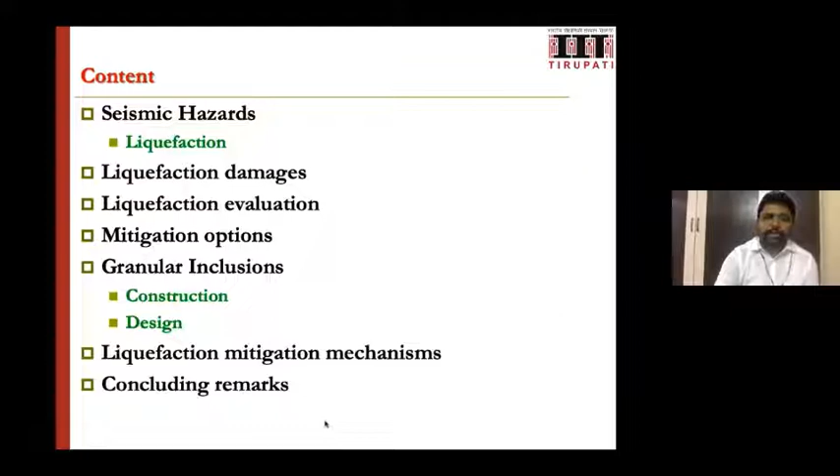This talk is mainly planned based on a publication, Engineering of Ground for Liquefaction Mitigation, which was published in a Springer book, Advances in Indian Earthquake Engineering and Seismology. Participants may refer to this for more details beyond the topic, and for important references.

Coming to the first thing, seismic hazards related to earthquakes and associated effects. I will not go into much detail as we all know. There will be several varieties of disturbances, basically due to loss of strength, that is less strength or less stiffness properties of various materials. We can talk about soil losing its stiffness, or material stiffness loss in the structure, and other sorts of strength loss and associated damages.

Particularly, the associated hazards include ground shaking and amplification, structural hazards, lateral spreading and associated failures, and another major set of seismic hazard is liquefaction, which is our topic of interest today.

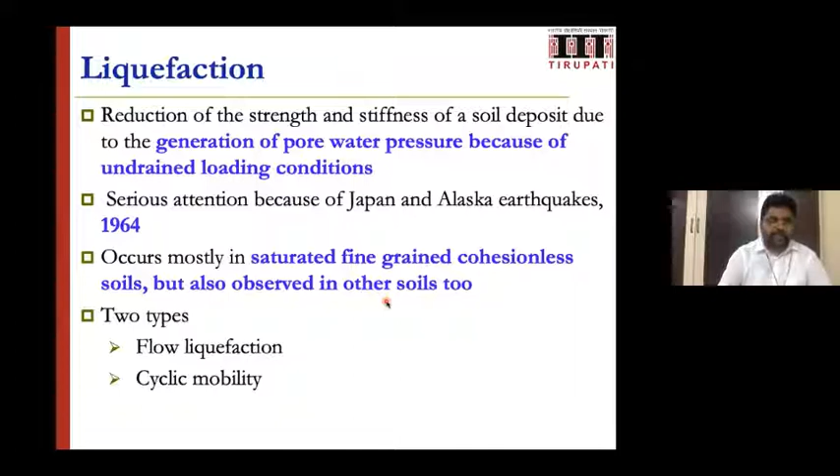This topic has been taken seriously into attention since 1964, after the Japan and Alaska earthquakes. In principle, mostly this occurs in saturated fine-grained soils, but it has also been observed in some other soils. Basically, when we talk about liquefaction, we can see two varieties: one is flow liquefaction, the other is cyclic mobility.

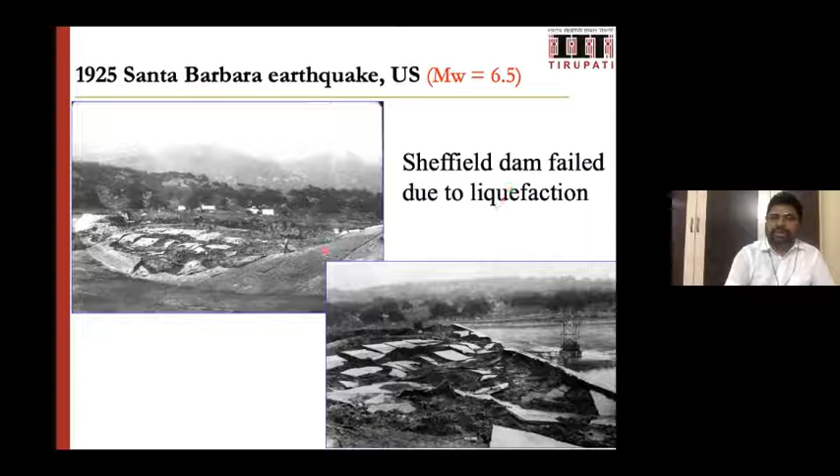With this brief introduction of liquefaction, let us see some pictures of liquefaction damages and how they appear. Starting from 1925, the Sheffield Dam failed due to liquefaction. You can see the extent of the damage and associated failure.

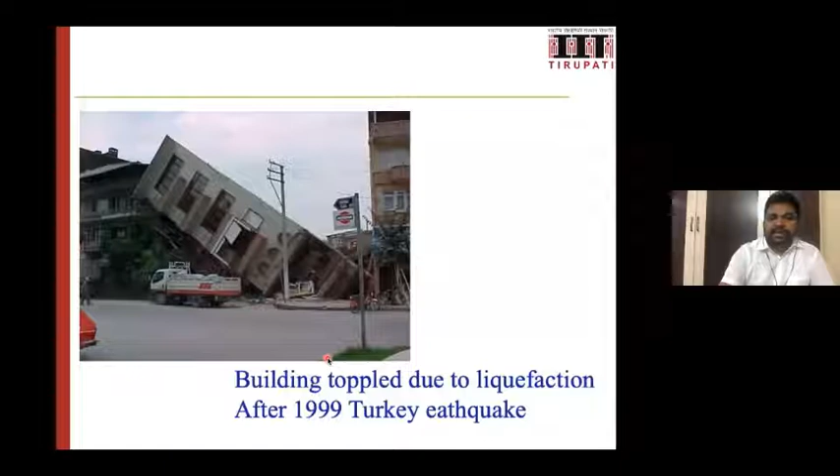This is the 1999 earthquake in Turkey, where a building collapsed due to liquefaction.

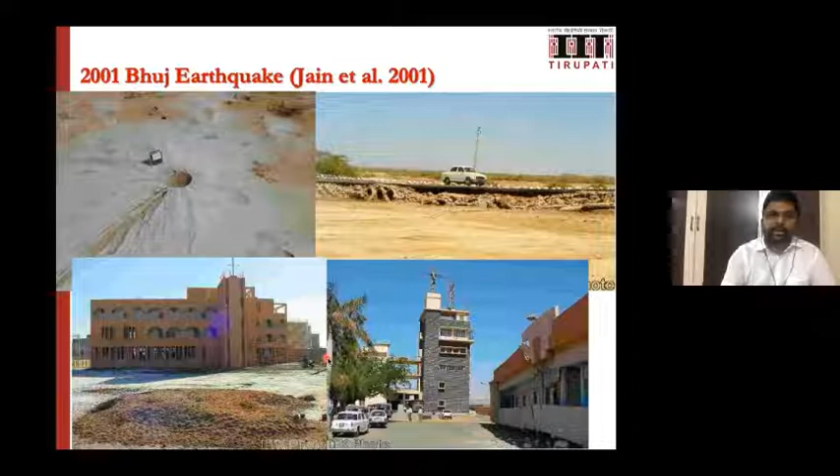Some examples from the 2001 Bhuj earthquake, particularly in India. I must say this 2001 Bhuj earthquake is one major earthquake which took earthquake-related studies to a much higher level; almost many institutes have since focused on studying liquefaction or seismic earthquake-related effects.

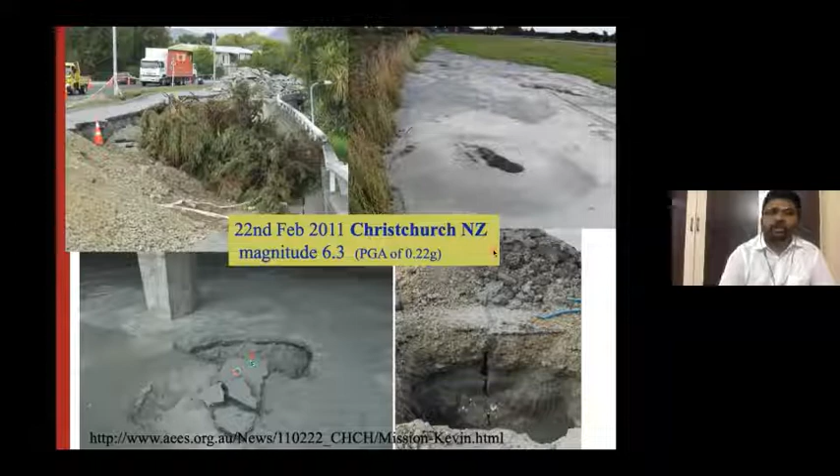The 2011 Christchurch earthquake in New Zealand, magnitude 6.3, shows the type of damages: soil coming out and huge soil failures.

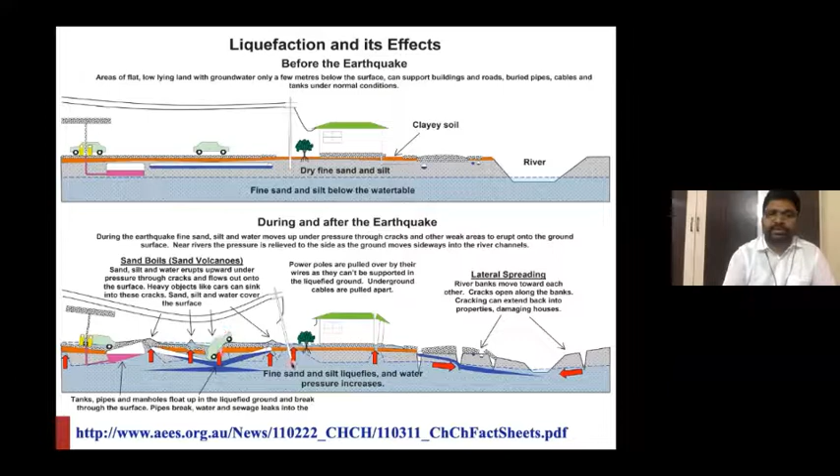This is one interesting image explaining the before-earthquake and after-earthquake situation and how various structures suffer. I like this picture, which schematically explains various features of liquefaction. You can see concepts like a vehicle going inside the ground and underground structures coming up.

One interesting thing is re-liquefaction. A site which has been liquefied earlier may also get liquefied again depending on the seismic history and how strong the new earthquake motion is. There are some evidences that re-liquefaction can happen; it's not that once it happened, it may not happen again.

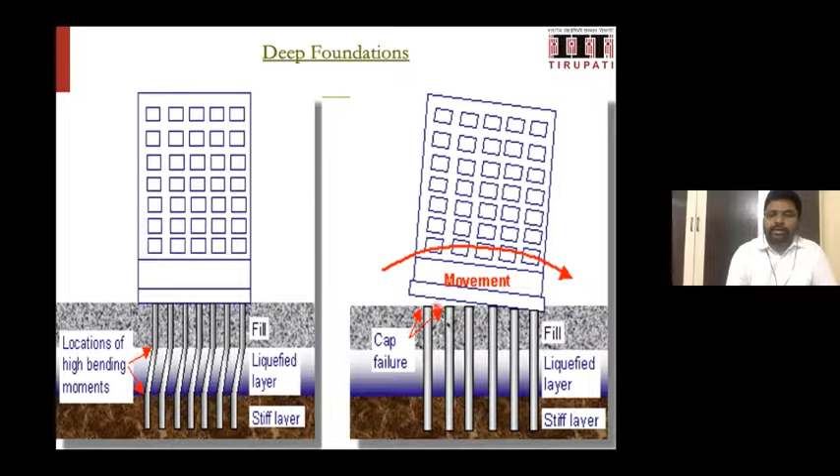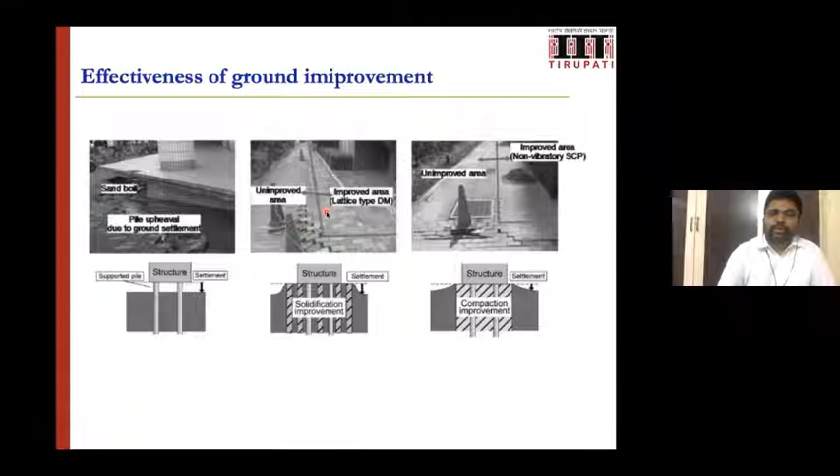What happens if liquefaction occurs with a combination of improved and unimproved ground? You can see the improved ground significantly behaved well in liquefaction, reducing damage. This is a particular example from the 2011 earthquake at a construction site where part of the site was improved and did not liquefy, while the unimproved part did liquefy. This clearly shows ground improvement works significantly.

With these simple pictures, we can relook into the definition: loss of shear strength due to excess pore water pressure generation. Cyclic mobility is a class where there's a gradual increase of cyclic strains. Here it's not complete loss of strength, but a reduction in strength, with more strains happening.

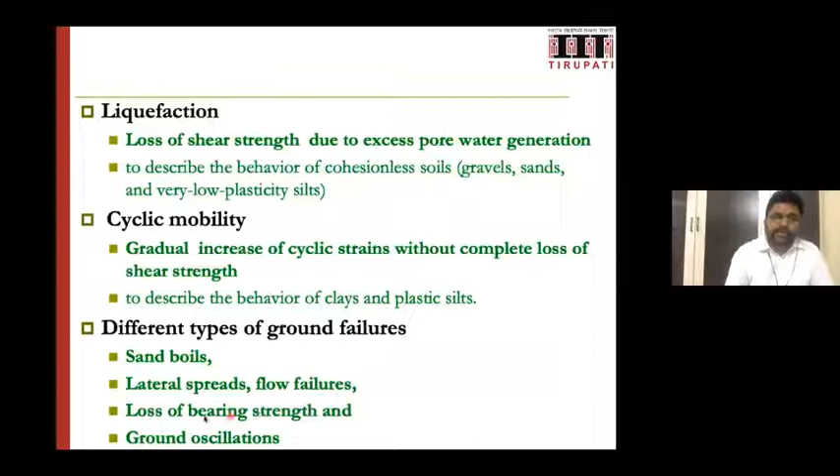Some of the signatures can be seen in terms of sand boils, lateral spreads, flow failures, loss of bearing strength, and ground oscillations, etc.

So which soils will get liquefied and how to predict it? Here are some of the conditions reported in various literature. Basically, to get a preliminary estimate of whether a particular soil site is liquefiable: if the groundwater level is less than 10 meters and there's a saturated soil layer at a depth of less than 20 meters, then there's a possibility of liquefaction. Then we can go for further analysis.

Fines content is generally preferred to be less than 35%, or plastic index less than 15, even if the fines content is more than 35%. Also, D50 should be less than 10mm and D10 less than 1mm. These are the probable typical soil properties.

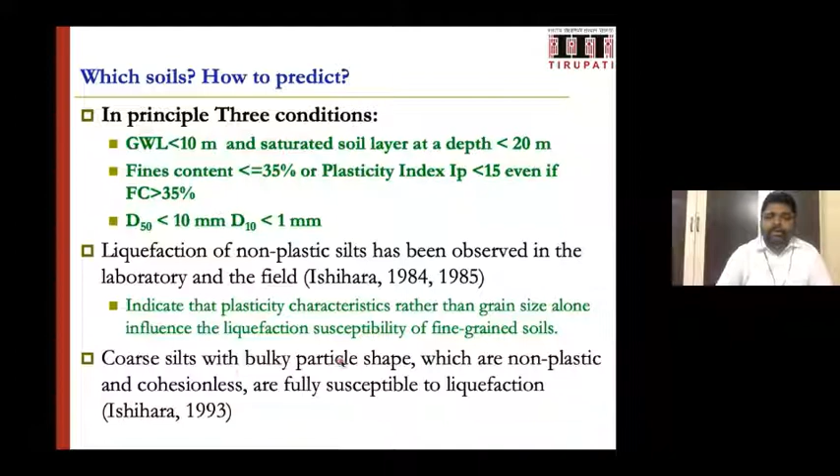Besides this, liquefaction of non-plastic silts has also been observed in the laboratory and field - some references exist. Coarse silts and bulky particle shapes are also reported to liquefy from earlier studies.

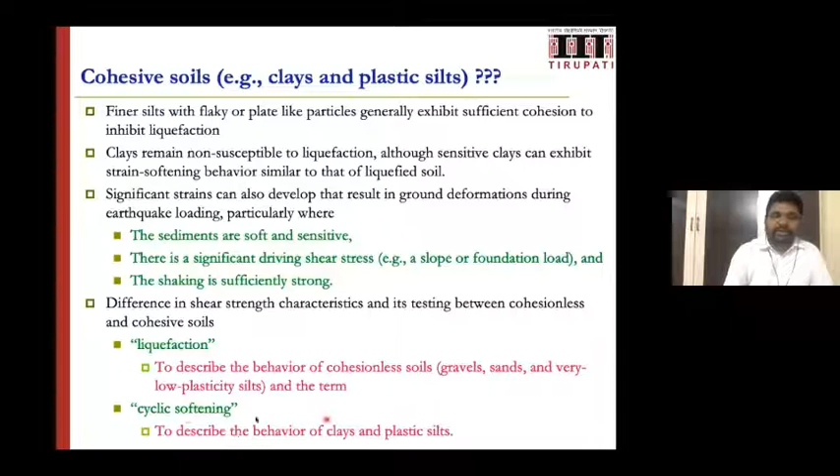For cohesive soils, it was earlier assumed they may not get liquefied, but there were several cases where cohesive soils were also found to liquefy, where researchers clearly defined liquefaction versus cyclic softening. Cyclic softening is another subcategory of liquefaction, and this behavior can easily be found in clays and plastic silts.

For fine-grained soils, criteria for liquefaction in terms of percentage finer, liquid limit, natural water content, and liquidity index are some of the limits proposed by Chinese criteria and the US Army Corps of Engineers.

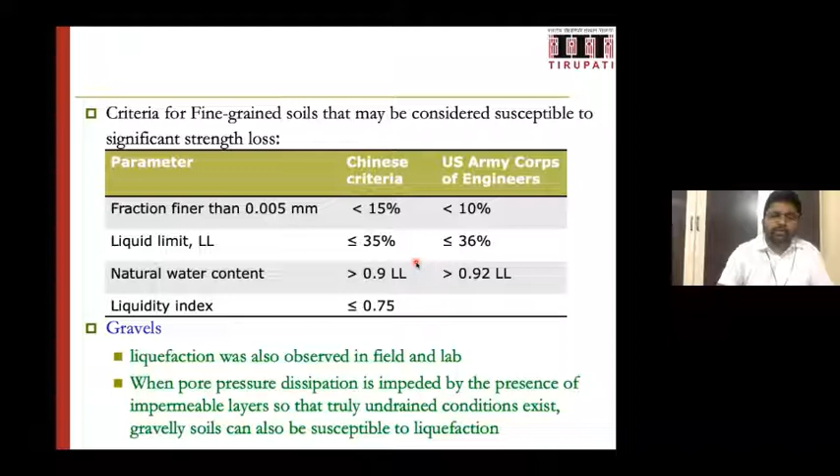Beyond sands and cohesive materials, gravels also tend to liquefy - some studies and observations were found in the literature. So we cannot eliminate any particular category; all soils tend to liquefy after meeting some particular criteria parameters. These are some of the various factors governing liquefaction in the field. Not going into details, just for academic interest, I mentioned these things for understanding.

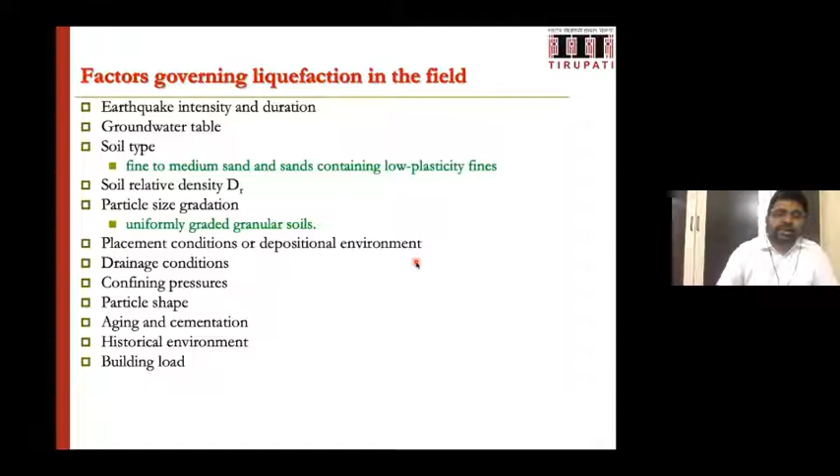Having that basic understanding about whether a particular soil site is going to liquefy or not, one can go into much more detail of evaluation of liquefaction potential. Various methods are available, starting from the simplified method, which is a cyclic stress-based method, and the cyclic strain-based method. These are linked with semi-empirical methods based on in situ test results.

All these in situ parameters can be taken into consideration, and using the semi-empirical method with the stress-based and strain-based cyclic approach, one can evaluate the liquefaction potential of the particular site. Besides this simplified method, one can go for effective stress time history models to analyze liquefaction, and some studies are available using the probabilistic approach.

Beyond this, there are elaborate, sophisticated experimental methods. Laboratory test methods can be at elemental scale, just to do some laboratory scale element tests, in the case of cyclic triaxial test, cyclic direct simple shear test, cyclic torsion shear test, etc. As a model test, one can think of the shaking table test and dynamic centrifuge test, which the previous speaker has already touched upon.

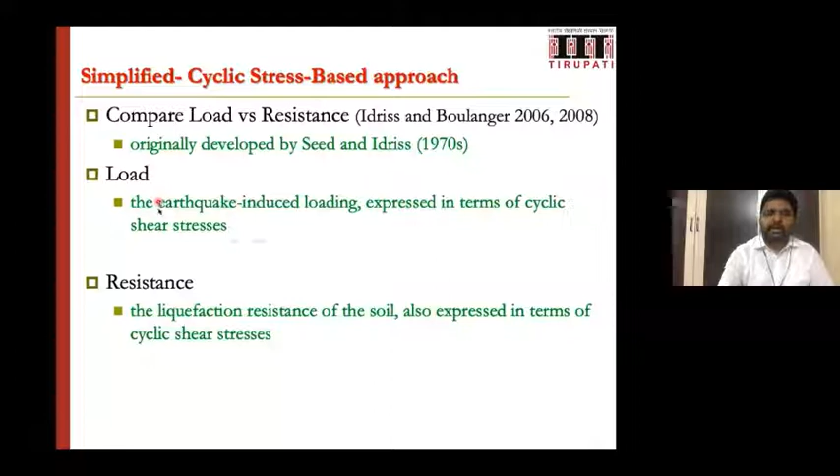Of course, it was originally developed by Seed and Idriss method in the 1970s. In this particular method, the load will be characterized in terms of tau cyclic, which is basically a function of earthquake acceleration and vertical stress, whereas resistance will be characterized as the liquefaction resistance of the soil, a function of your in situ parameter. It can be SPT value or CPT resistance, and then earthquake magnitude, percentage fines - these are the things that come in.

So if you have the load and resistance calculated, one can calculate the liquefaction resistance in terms of a factor of safety, as a ratio of resistance versus load. That's a simple framework of this simplified cyclic stress-based approach.

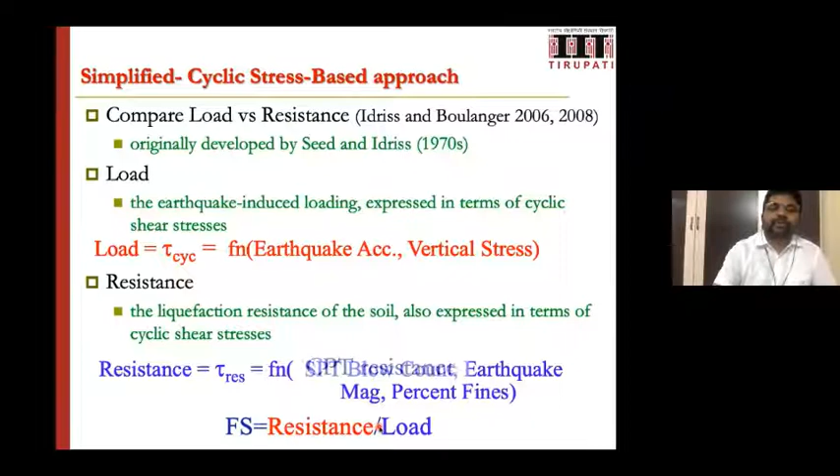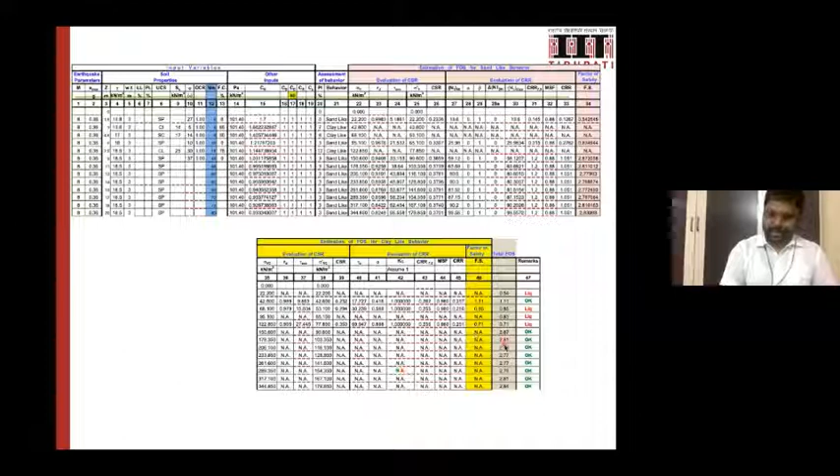This is one particular example I'm presenting here. Suppose if you have the soil profile, and the SPT values of this particular site, one can do some calculations referring to the Idriss and Boulanger method, and calculate the factor of safety, evolving this particular graph of factor of safety with depth. You can see where the factor of safety is less than 1, we consider that a liquefiable soil.

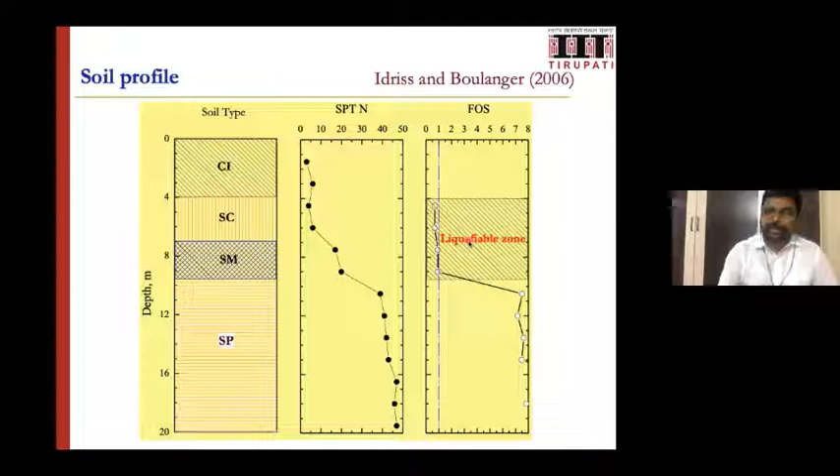Please note that it's not the case that factor of safety greater than 1 is completely safe. Excess pore water pressures can develop even if the computed factor of safety is greater than 1. Here's one particular figure which I'd like to show bigger.

The residual excess pore water pressures, if it is 0 to 1, are there, and factor of safety against liquefaction is 1 to 2.5. That means even if your factor of safety is somewhere around 1.5, there is significant amount of pore water pressure, up to about 30-35%. The associated change in effective stress, the associated change in strength of the soil, need to be considered for evaluating the strength of the particular ground under these conditions.

Suppose if you see the factor of safety within this region, within 1.25, the pore water pressures may go up to about 0.5, 0.5 to 0.2. So accordingly, we have to take a decision on what factor of safety we need to take, and accordingly we need to analyze the particular structure.

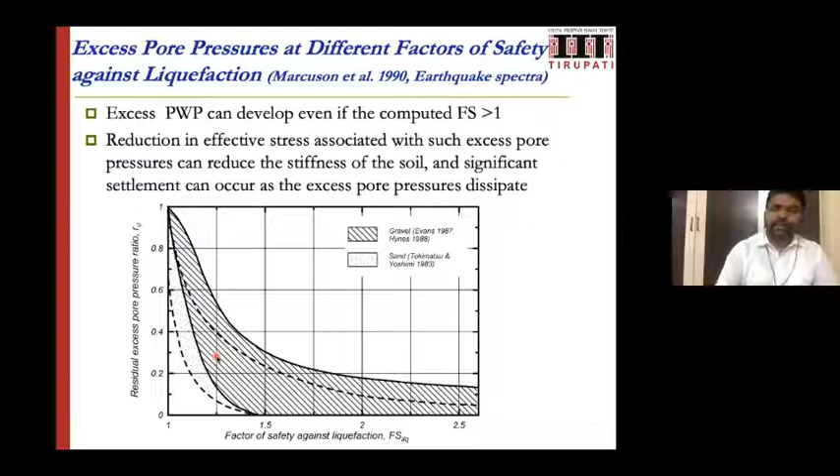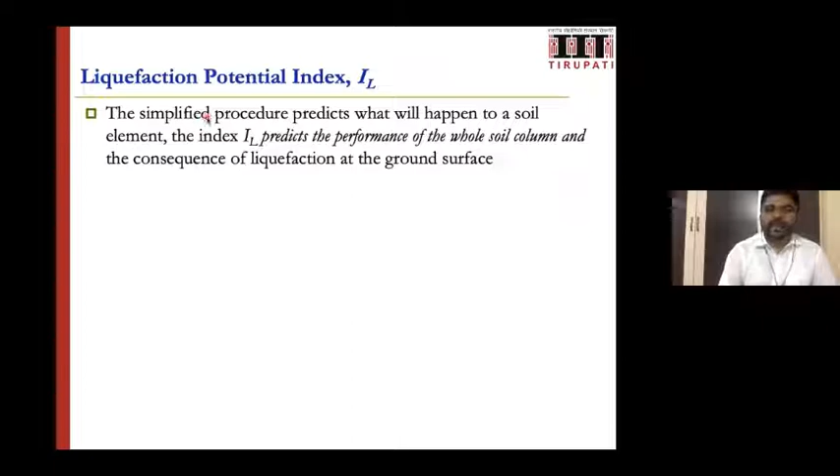Besides this factor of safety approach, because the factor of safety varies at different elevations, what value to be taken and how to consider the particular site is a bit confusing. So liquefaction potential index, LPI, is another parameter which can be taken to evaluate for a particular site.

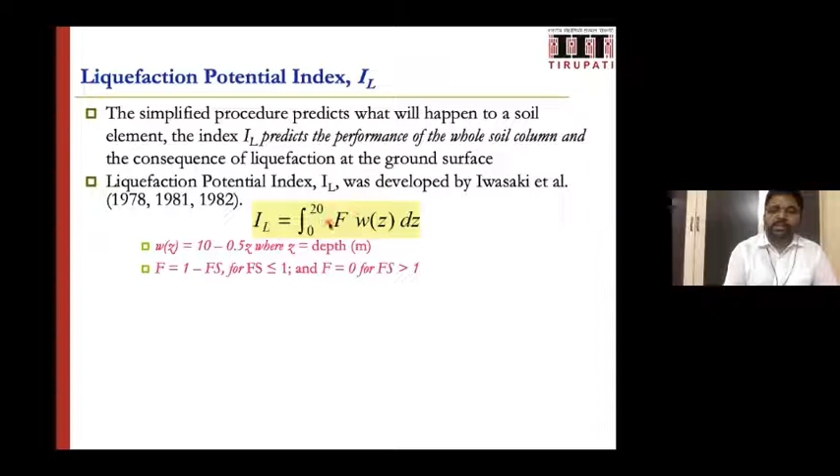What it does is take the factor of safety values for a whole depth of up to 20 meters and integrate them to give you an index. Based on the index values, one can classify the severity of liquefaction at a particular site: IL equal to 0 means very low, and IL greater than 15 means liquefaction potential is very high. One can refer to these references for the severity values.

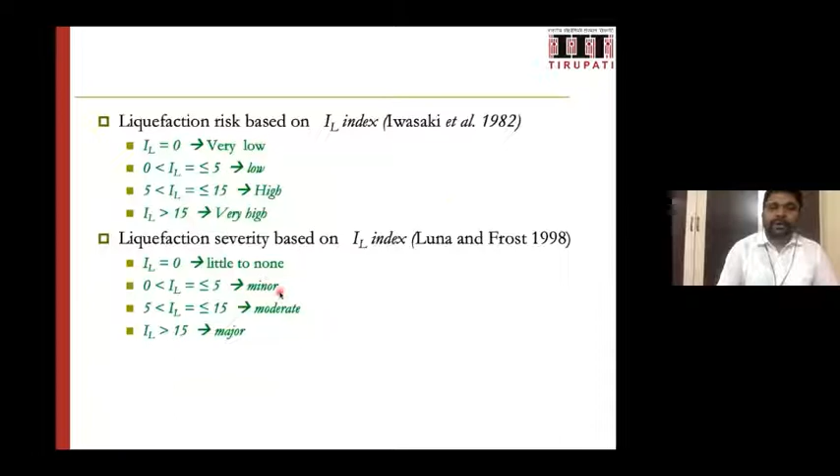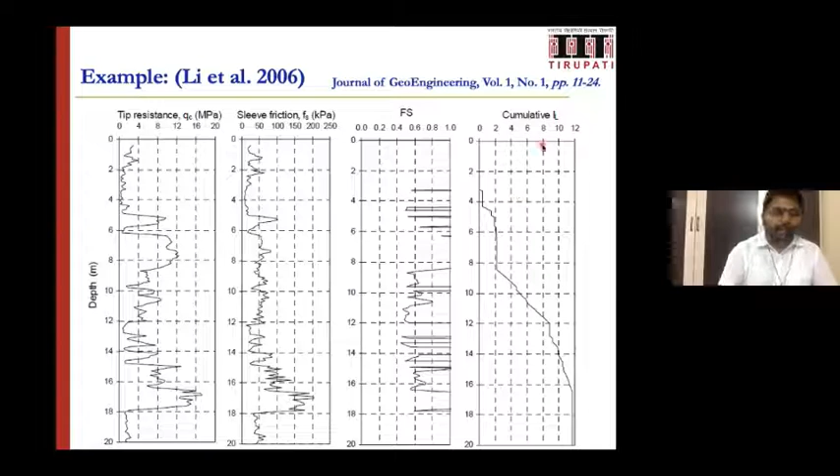This is one example where Li (2006) presented factor of safety values and the cumulative liquefaction potential index (LPI) value. As mentioned, there are also studies for liquefaction evaluation based on a probability-based approach.

Suppose after evaluation you find the ground is liquefiable—what to do? Basically, improve the engineering properties and reinforce the soil to resist seismic loads, and provide additional drainage, since liquefaction is due to generation of excess pore water pressure. If you provide additional drainage, the generated pore water pressures dissipate immediately, minimizing damage. Also, since this is due to the groundwater level, one can reduce the groundwater level at the site to avoid liquefaction in the first place. These are the things one needs to apply in principle.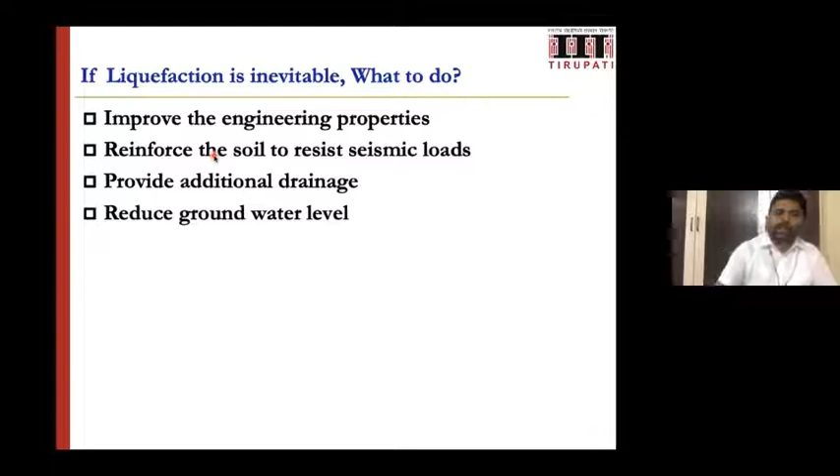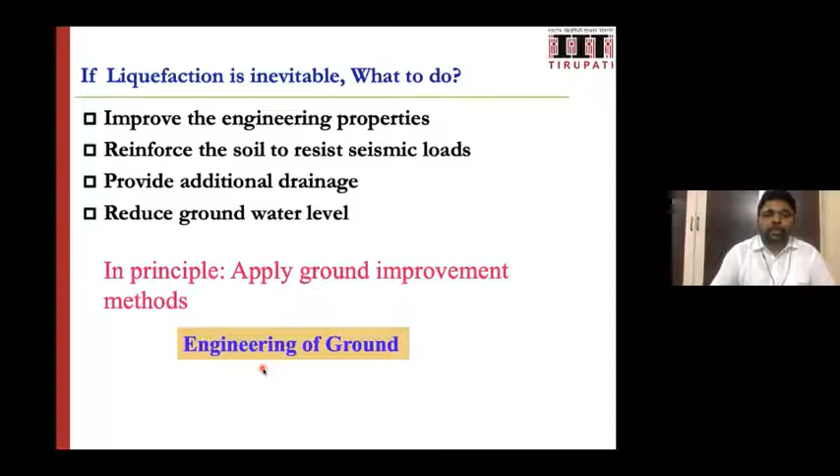How to apply? In principle, we have to apply ground improvement methods—engineering of the ground. Various ground engineering and improvement methods will be looked into, and applied accordingly.

What are the ground engineering options? Various ground improvement methods can be classified in terms of concepts like densification—improving the density of the ground, making it stiffer, more densified and compacted. Another concept is solidification: soil particles are particulate in nature, but if you solidify them into a coherent, cohesive material, it can resist more shear.

In some places we can replace with suitable soils—if the soil is very weak and highly problematic, we need to go for replacement. In other cases, we put elements like stone columns and deep mixing, or other reinforcement elements. And as mentioned, drainage and lowering the groundwater is another mechanism: providing drainage is one thing, lowering the groundwater level is another. These are the concepts applied for engineering the ground for liquefaction mitigation.

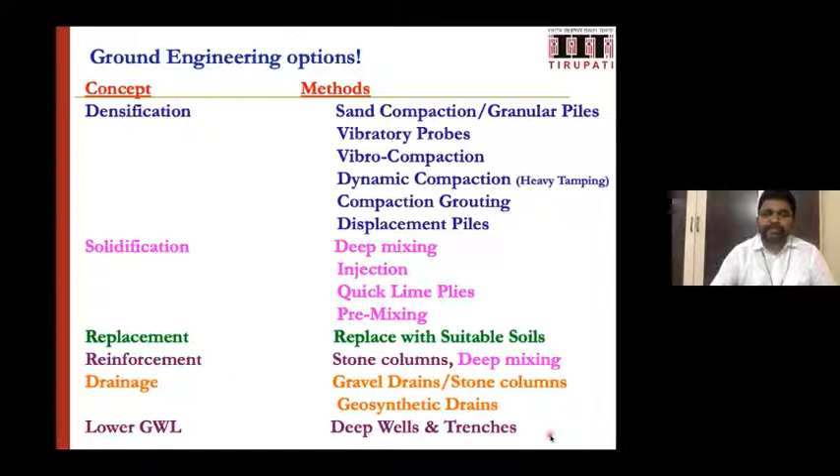Of course, to lower the groundwater level, one will apply deep wells and trenches. These are the overall class of ground engineering methods, various things.

This is another interesting topic: which method can be applied for what type of soil, because a wide variety of methods are there. So depending on the type of soil, one can see which is more suitable.

This particular figure was presented by Mitchell in 2008, showing general applicability of ground improvement methods for most liquefiable soils. This is the range, two borders shown here, representing the soil grain size distribution curve range. This shaded range is the soils which are most liquefiable. So almost all ground improvement methods can be considered for liquefaction mitigation.

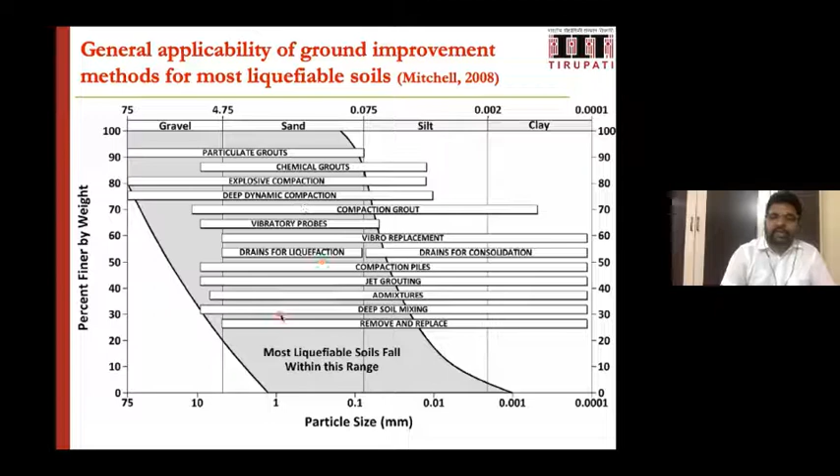With that overall view of ground improvement methods or ground engineering options, granular inclusions in the form of granular piles, sand compaction piles, or stone columns can give various mechanisms. They function as reinforcement, as a drainage medium, and as a densification method. Because it offers three different principles, they are more effective in mitigating liquefaction.

Some advantages are low energy utilization and cost effectiveness while building stone columns, increased bearing capacity, and reduced settlements. Because they provide additional drainage, even other than for liquefaction, they accelerate consolidation and also permit construction on fills. Even in fills, if you install this, vehicular movement and other activities can be done.

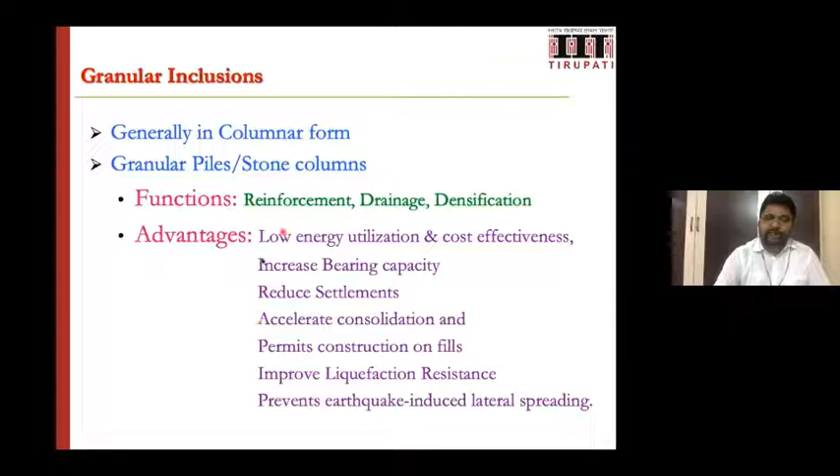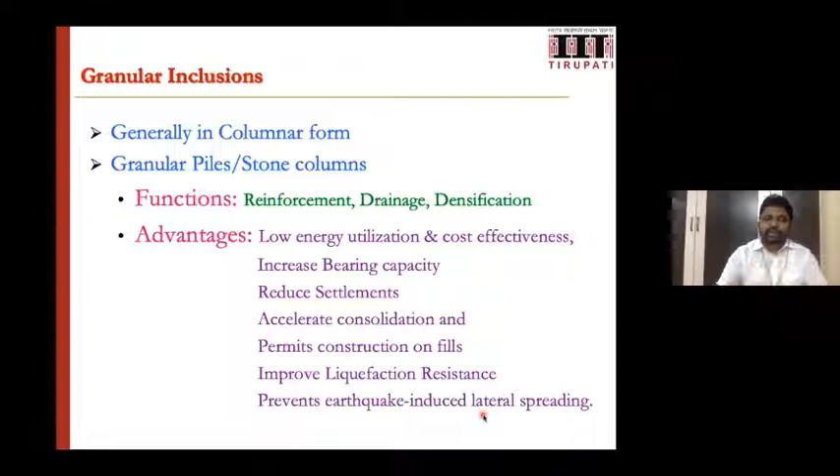Besides these general advantages associated with granular stone columns, they improve liquefaction resistance through all these behavioral improvements, and also prevent earthquake-induced lateral spreading because the high stiffness elements act as a reinforcing effect and are able to resist a lot of shear forces. So earthquake-induced lateral spreading can be prevented using these granular inclusions.

So what are these stone columns? They are installed in a pattern onto the entire ground as columnar inclusions, installed for a height h, at a lateral spacing s, and the stone column diameter d can be considered. These dots are the stone columns, arranged in a particular pattern, covering the entire ground.

Based on this particular pattern and spacing, one can calculate the effective zone. Each particular stone column's controlling behavior will be controlled within that zone. If you take this particular unit part, we will consider this as a unit cell.

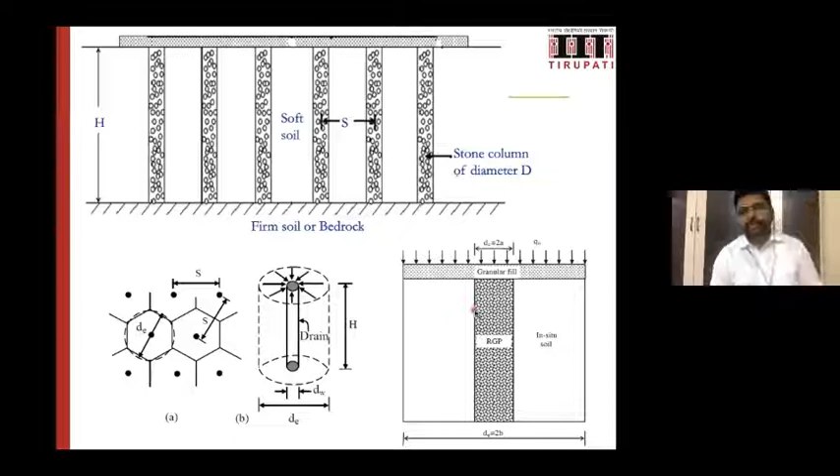So a unit cell can be taken in this particular way. This is the granular pile and the surrounding soil. Over this, a granular blanket will generally be provided to distribute the loads uniformly and to maintain the strain compatibility between the neighboring soil and the stone columns.

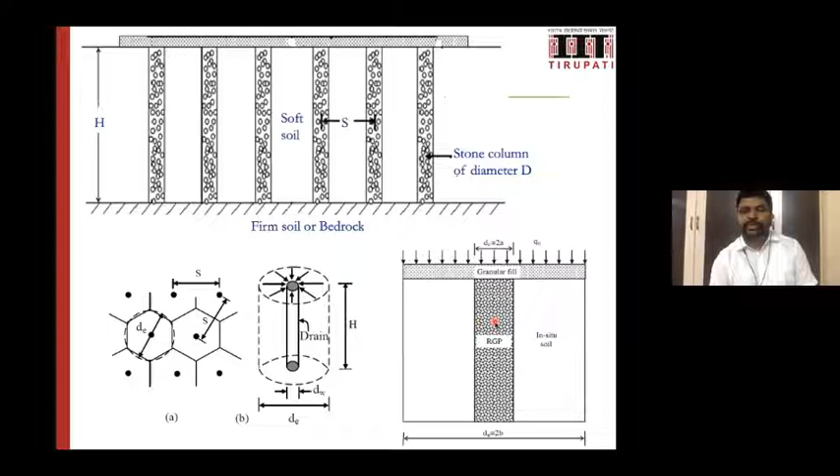So that the whole composite ground performance is improved significantly. As I mentioned, different patterns can be followed: triangular pattern, square pattern, or hexagonal pattern. Accordingly, the unit cell contributing areas will be slightly different, and the contributing areas will be calculated as per this.

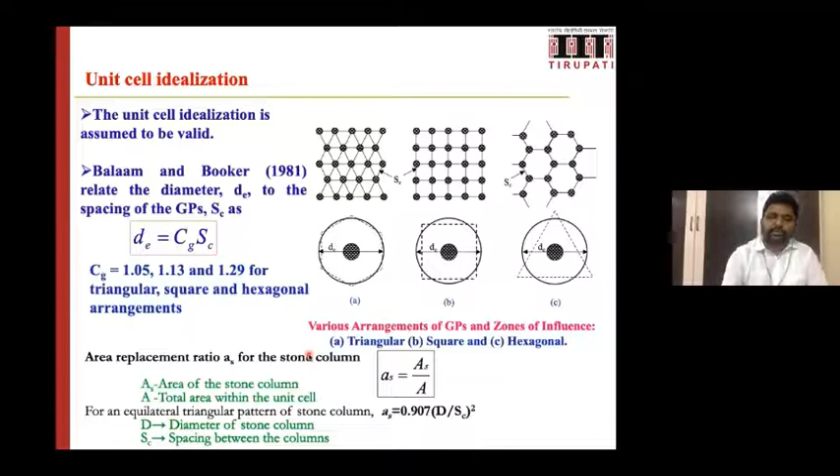So while analyzing this stone column reinforced ground, the area replacement ratio AS for the stone column, which is the ratio of AS by A, is an important parameter which will be considered for further analysis and understanding.

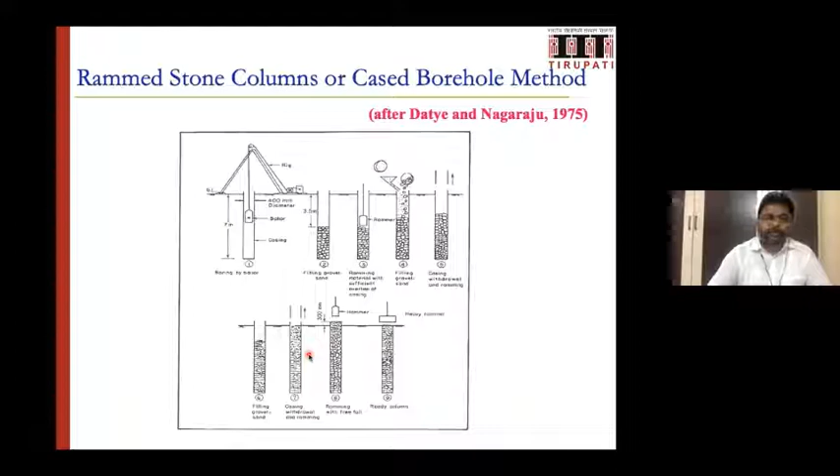Stone columns can be constructed using the vibro technique: vibro compaction, vibro replacement. Again, you have the wet method and dry method, and I'm not going into details. There's also the rammed stone columns or cased borehole method, which is an Indian method of stone column construction, being practiced in different locations.

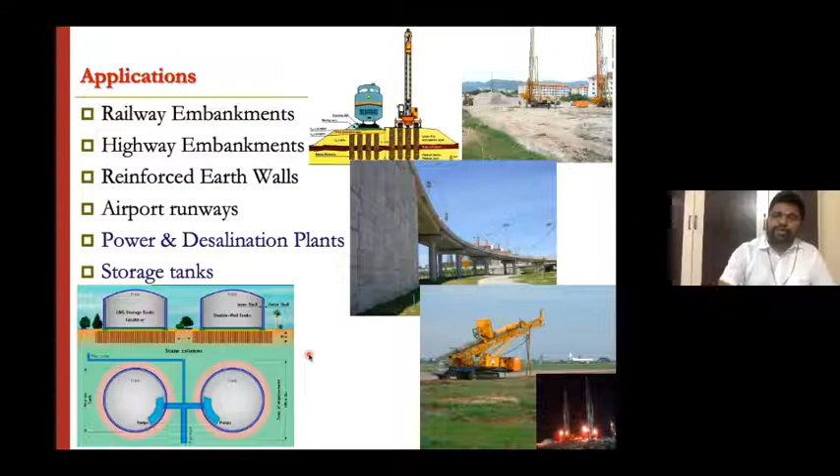These stone columns are generally applied to different projects: railway embankments, highway embankments, reinforced earth walls, airport runways, including all projects. Name any project, we can use this particular technique for improving the ground and providing the benefit. So that's the overall view of what are the granular piles and what are the stone columns.

Coming to the design aspects of stone columns, basically design parameters involve diameter of the granular pile, spacing between the granular pile, and pattern of the installation—what pattern of installation needs to be followed.

There's also information about the length of the pile, up to what length the stone column needs to be installed—that means the termination depth—and gradation details of the granular material.

The stone columns will be prepared with some material, so the material gradation details also will be provided. These are the design parameters that need to be given.

Of course, various useful references are available to work out these things. A very classic one is the FHWA report in 1983. And there are the Priebe documents widely used, from 1995 and 1998—one is the basic design for vibro replacement, and the second 1998 document is particularly for preventing earthquake-induced liquefaction.

Okay, so they are widely used—Priebe being the Keller Ground Engineering company's guidelines, widely used. Another reference is JGS, the Japanese Geotechnical Society 1998 document, which has compiled a lot of information across Japan on various ground improvement case studies, failures, and so on.

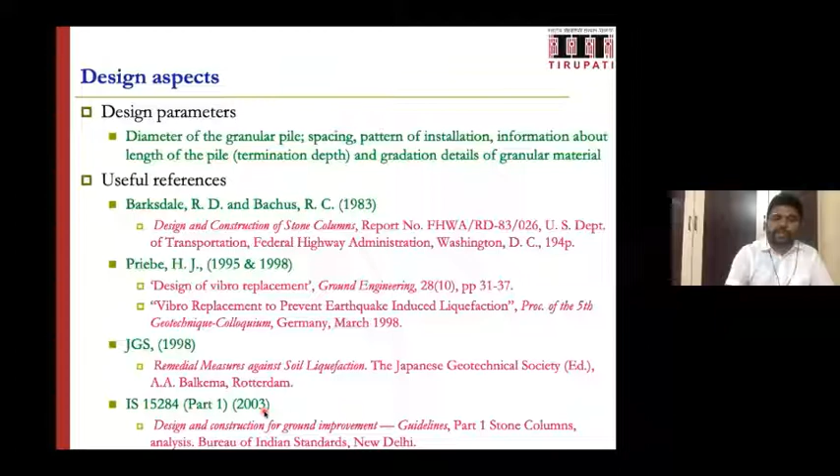So as I mentioned, design parameters include the backfill material—generally crushed rock of size 5 to 75 mm—and the friction angle of that material.

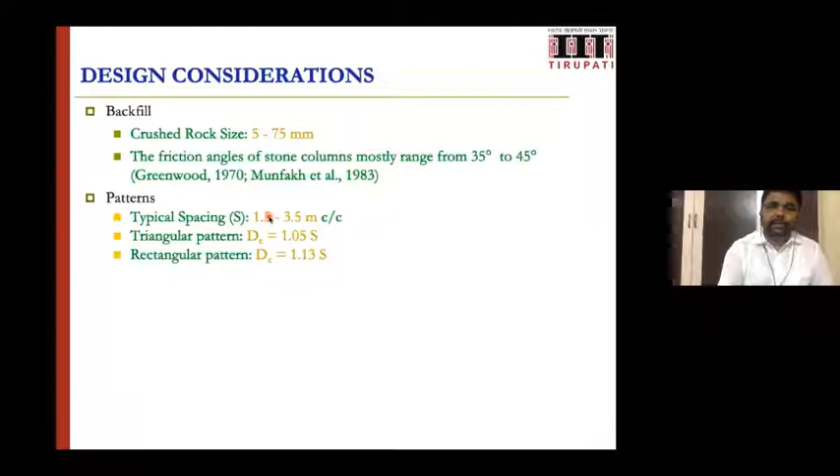It ranges from 35 degrees to 45 degrees, and patterns are triangular or rectangular, typically with spacing of 1.5 to 3.5 meters center to center, depending on the size of the project and so on. Generally, the diameter of the stone column will be in the range of 0.6 to 1 meter.

This is again based on the size of the equipment available and the method of installation, etc. So the area replacement ratio, another parameter, is generally used in the range of 0.15 to 0.25.

And depth of improvement is typically ranging from 5 to 15 meters. Of course, the length of stone columns can go up to 20 meters also, depending on the stratum—up to what depth, what requirement, what is the functionality of the stone column, that we can decide.

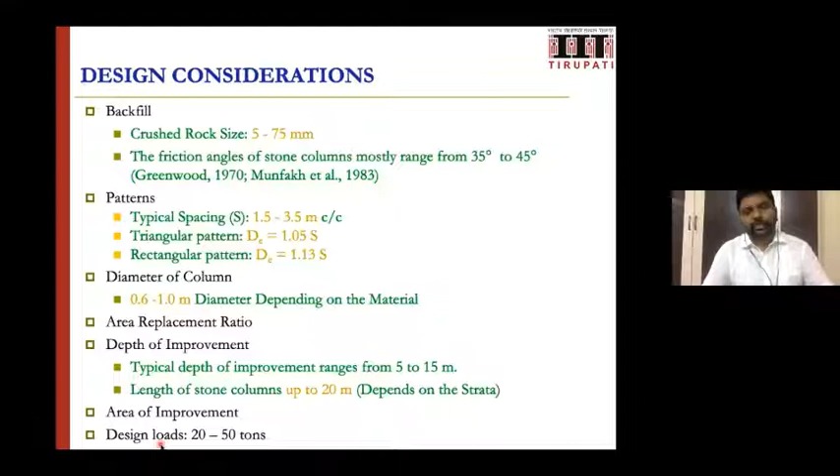Area of improvement, again, up to what extent the area needs to be improved—suppose you have the project and a certain built-up area, beyond that built-up area, how much area needs to be improved depends on the application we are looking at. These are the various parameters that need to be looked into when designing. Approximately, the design loads for these stone columns would be about 20 to 50 tons.

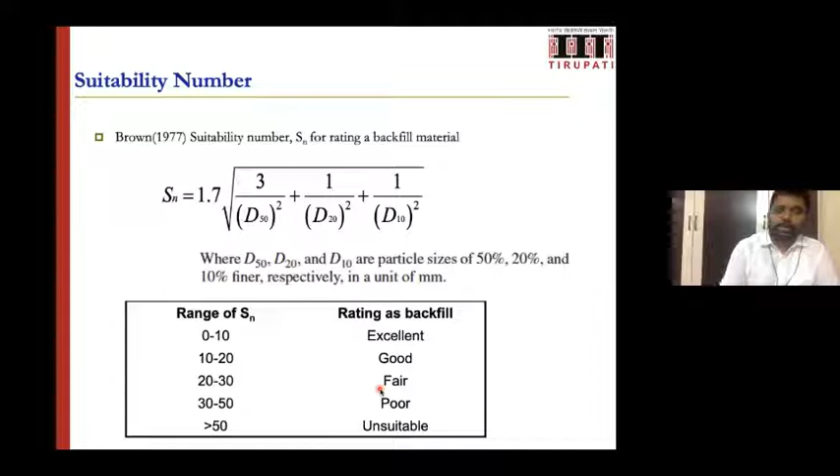Depending on the suitable material, whether it is a very good material or reasonable material, accordingly one can decide. So these two criteria, observing this distribution and calculating this suitability number, one can pick the material here.

What is this N? Because of strain compatibility, both the stone column material and the neighboring soil material will reach the same level of settlement. Obviously the stone column material, being much stiffer, can take higher stresses for the same level of strain compared to the neighboring soil. So the stress concentrations will be different, stress values will be different. Sigma S is the stone column stress and sigma C is the neighboring clay stress.

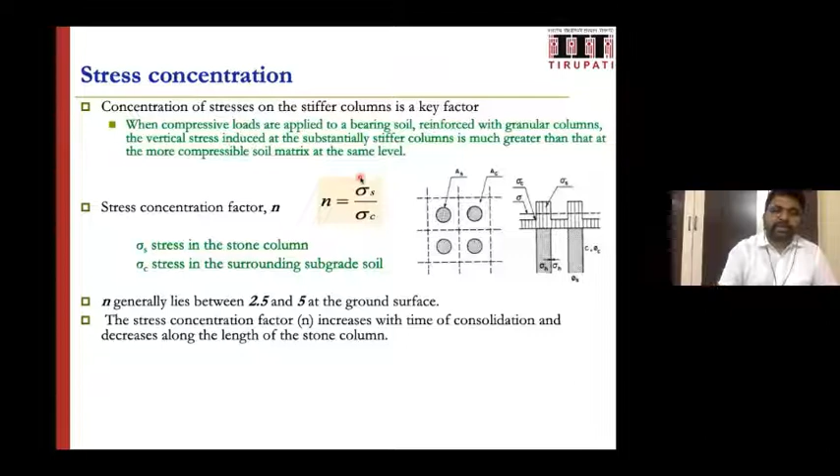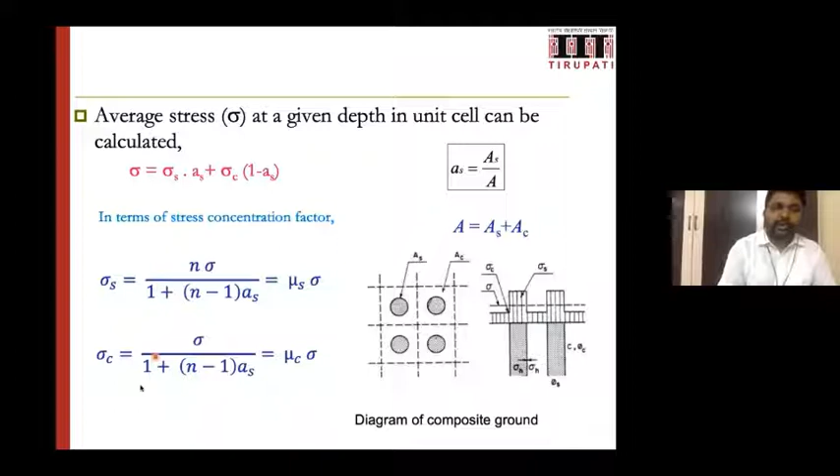So the stress value ratio is a stress concentration parameter, another parameter generally used in the design. The same thing is explained here as the stress concentration factor. Generally this factor would be about 2.5 to 5 at the ground surface, and it will change with depth. Based on strain compatibility, one can calculate the stress in the stone column and in the particular surrounding material to get some understanding of it.

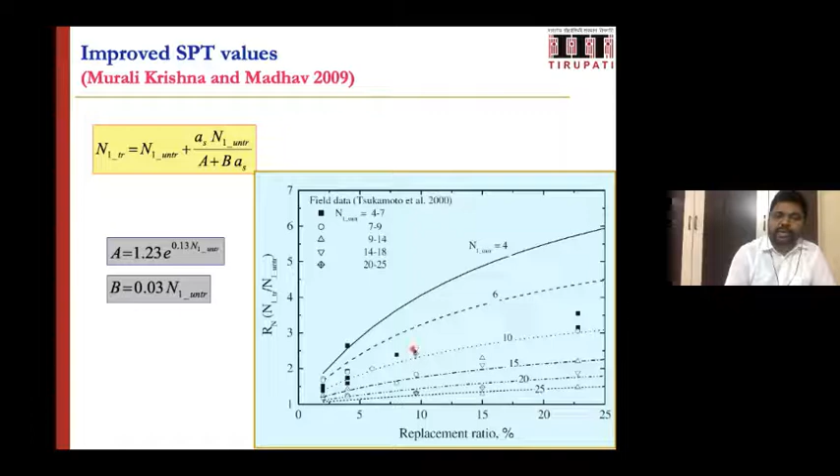With the installation of stone columns, we can improve the ground parameters. This is the improved SPT values - sand compaction piles or stone columns, if installed into the ground, will improve the N values significantly. Improved N values data was compiled here, and a trend line was fixed to calculate the N1 treated value with reference to the untreated value. Based on the area replacement ratio, one can have some basic estimate.

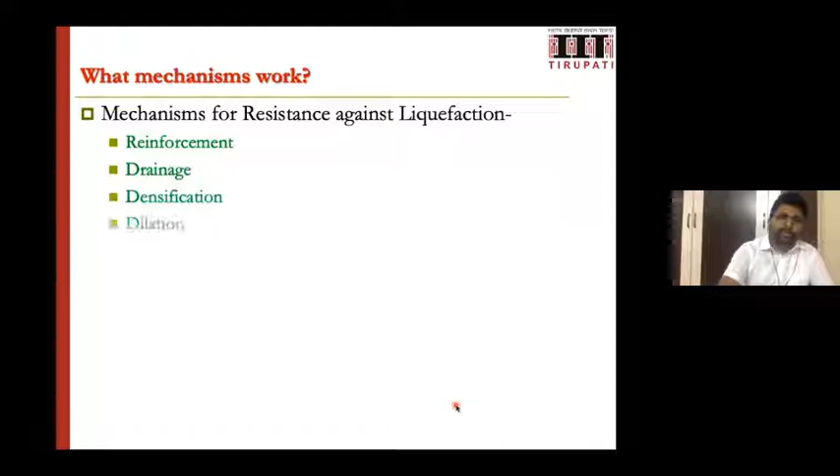Now coming to the mechanisms working for granular columns as per liquefaction hazard mitigation - we already discussed the mechanisms required to improve properties: reinforcement, drainage, densification, dilation, storage, etc. Let us see the reinforcement effect, explained by Poorooshasb et al. in 2006, for the stone column reinforced ground.

You already saw this in plan view, how it looks. In cross section, how they look - the shaded elements are the stone column elements, which are highly stiffer elements. So when you have a structure here and an earthquake happening, as we saw earlier with the stress concentration factor, the vertical stress coming onto the ground will be distributed between the clay and the stone column, maintaining strain compatibility.

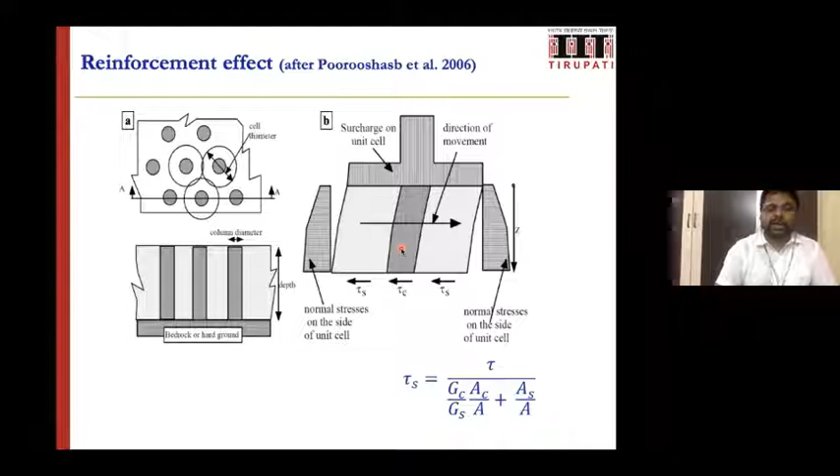A similar mechanism applies to the lateral stresses, shear stresses. So the total shear stress generated by the earthquake will be distributed into tau C and tau S, and calculated accordingly. Large shear stresses will be taken care of by the stone columns, which is the significant reinforcement effect. With this reinforcement effect, the shear stresses on the neighboring ground will be much lesser compared to when there is no stone column reinforcement available. Besides this, there is also a drainage mechanism.

If you have the drainage, water will come into the drains and easily come onto the surface. So excess pore water pressures that are being generated will be dissipated. This particular drainage method has been investigated thoroughly through various models.

This is a shaking table test where they installed sand piles and studied the pore water pressures. With the non-improved ground, you have the pore water pressure distribution like this, and for the improved ground with different spacing between piles, like 3D, 3.5D, 4D, you have these pore water pressures. In all cases there is significant reduction, but as you reduce the spacing, the pore water pressures reduce even more.

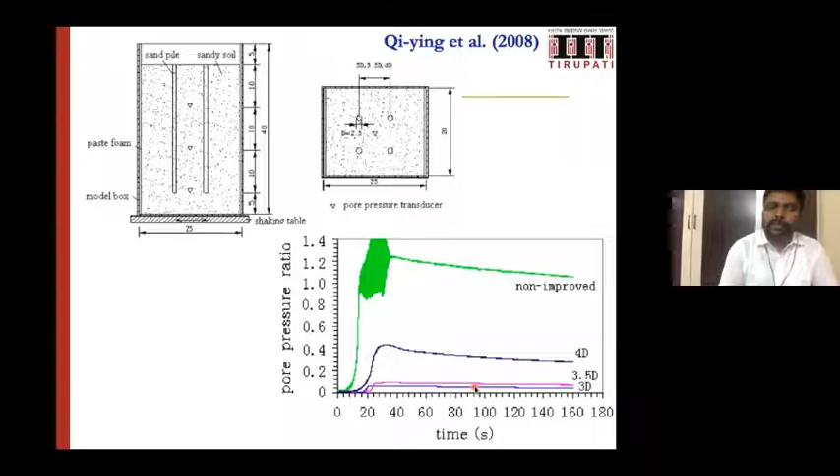That's the observation. So this drainage effect was taken into the model as part of the analytical model, originally by Seed and Booker in 1977. This is basically a radial consolidation model, and they have given the solution.

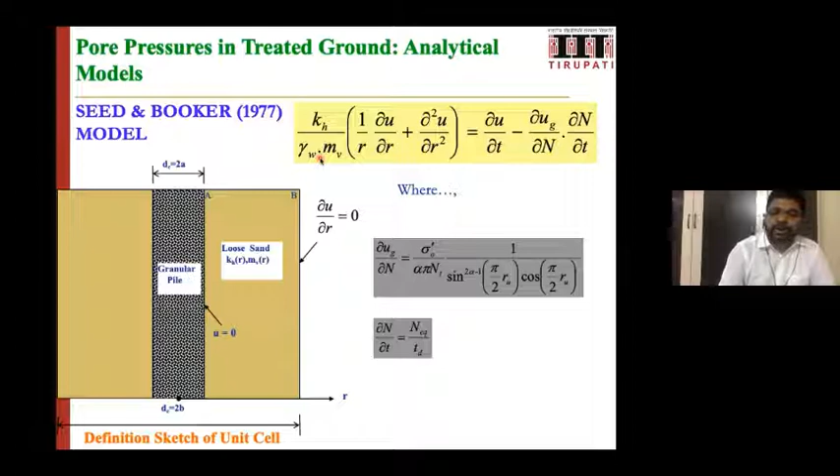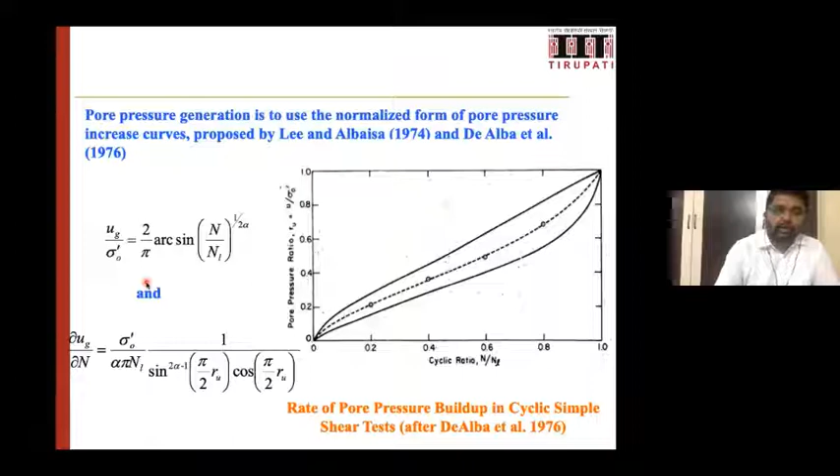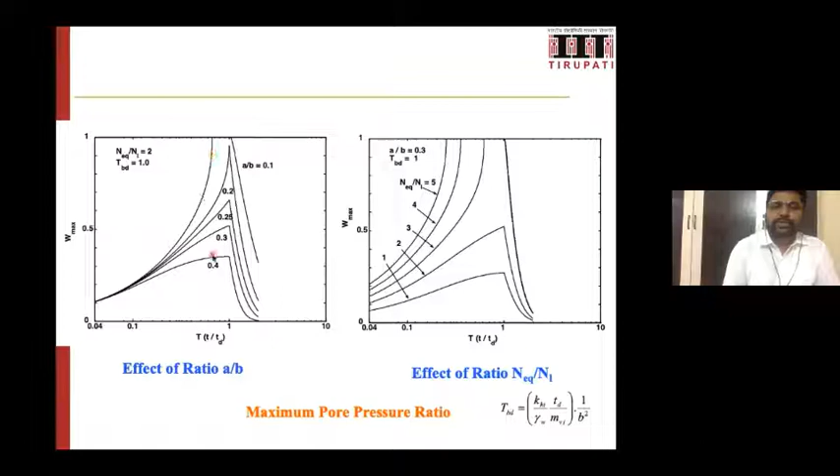Of course, for a given set of parameters, this is the maximum pore water pressure ratio, with A by B being the area replacement ratio. It was presented in a different way to show the maximum pore water pressure for a given set of other parameters, Tbd being another parameter used in the calculation. As you can see, for any particular condition, if you increase the area ratio, the pore water pressures come down. That's the basic observation.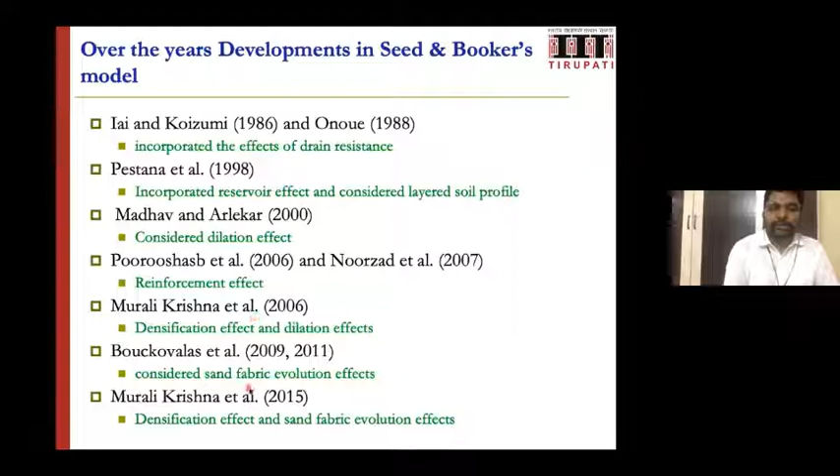So this was the originally developed Seed-Booker model, and over the years several researchers have worked to improve it, adding more insights and parameters, developing different models. Particularly during my master's degree with Professor Madhav, and with a couple of my students, we also did some work on this Seed-Booker model.

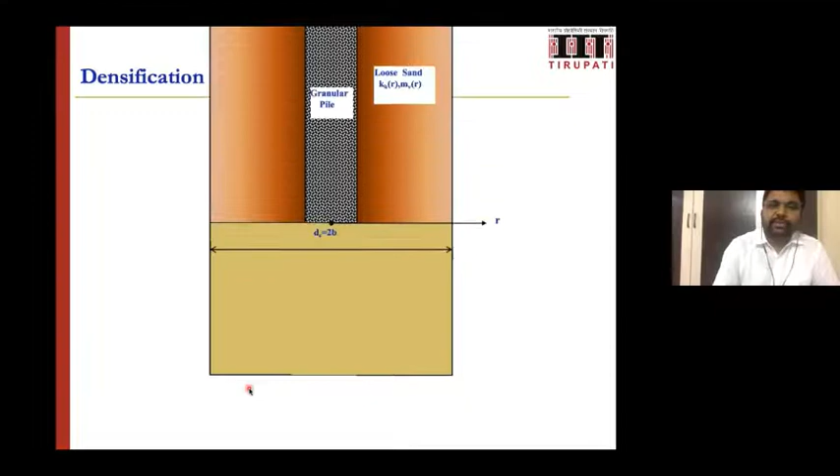One primary thing to consider is the densification effect. As you install the granular column, the soil gets densified. The densification is greater very close to the stone column, and it keeps reducing as you go toward the end of the unit cell. That means the soil parameters within this region are not constant; they change with distance from the center of the pile.

In terms of stiffness, it will be more here and less further away. In terms of permeability, it will be less here and more there. These considerations are taken into account, and one can calculate the equivalent deformation properties by considering two variations: linear variation and exponential variation. That means the modulus is more here, less there, and changes continuously.

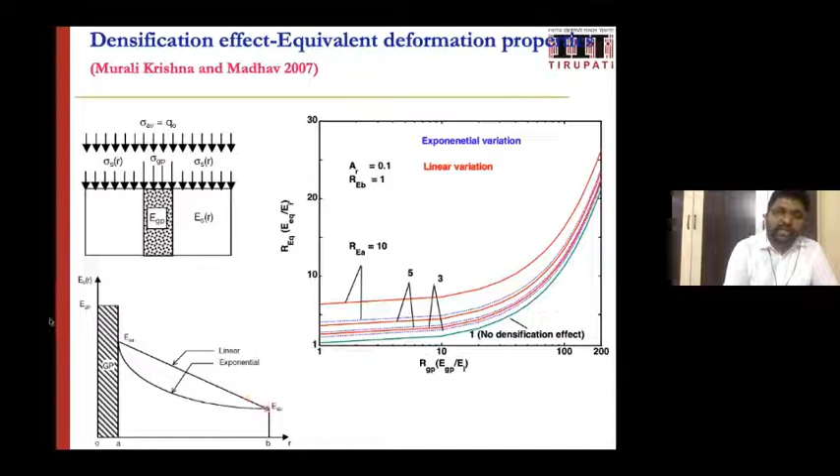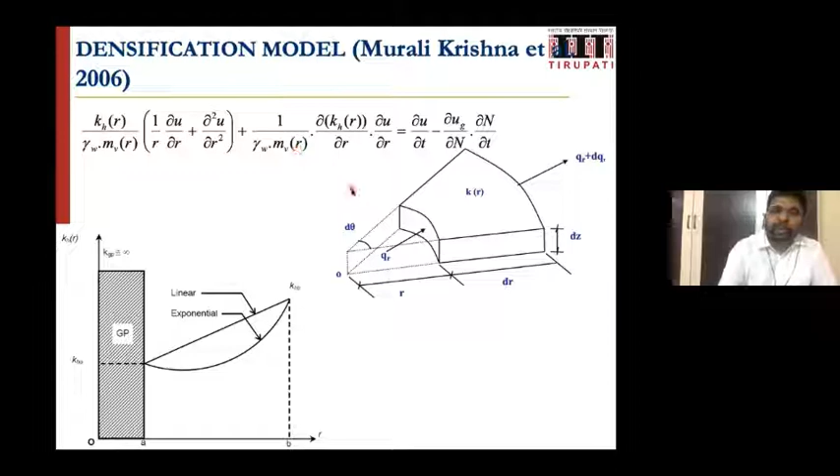So this densification model is incorporated into the pore water pressure model, the original Seed-Booker model, and some analysis was given based on this.

Further beyond densification, the dilation effect is another important parameter. Since stone columns are highly dense in nature, during vibration from cyclic loading, some negative pore water pressures are generated. What does this negative pore water pressure do? In addition to natural drainage, it attracts more pore water inside and reduces the excess pore water pressures generated in the soil.

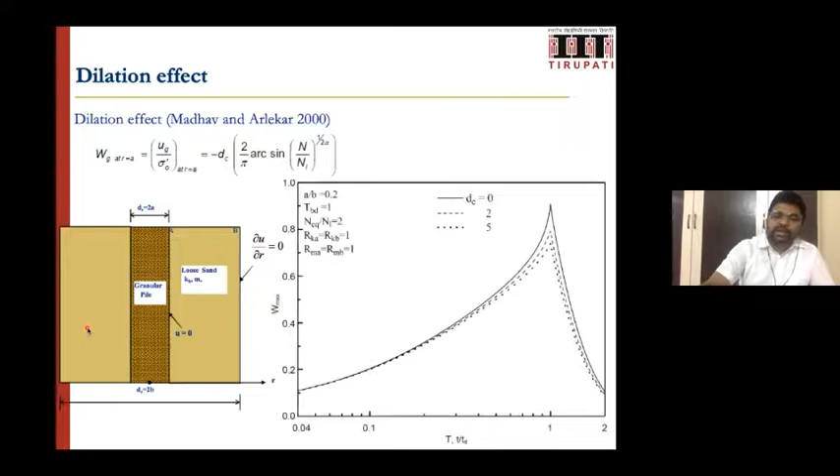Thereby, it will reduce the total pore water pressure. That's the concept that has been included in the analysis, and it was shown that the dilation effect is significantly reducing the maximum pore water pressure value. So what we tried is to combine this densification and dilation effects into the model and show its effectiveness together.

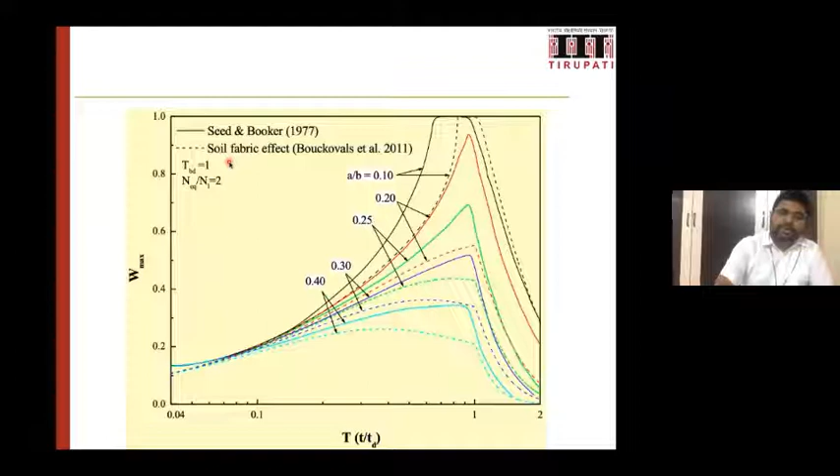In reducing the maximum pore water pressures, which can be seen from these figures. Of course, some researchers who worked on the soil fabric effect found that as you improve the ground, the pore water pressure generation will be changing. These associated effects can also be taken into consideration, which will further reduce the pore water pressures. So thus all the different mechanisms can be considered for improving liquefaction mitigation using stone columns. These are some examples of using stone columns for liquefaction mitigation.

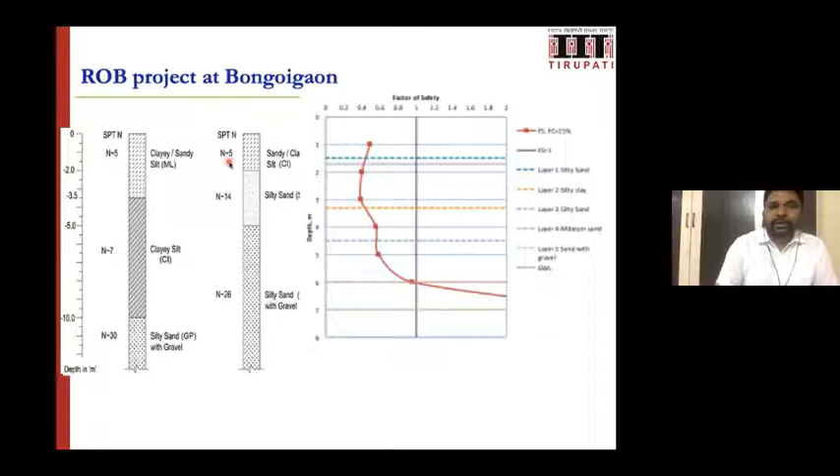Okay, so that's about stone columns. Besides stone column methods, one can see various other types of things like vibro compaction is another method. Of course stone columns we have talked about, and dynamic compaction and compaction grouting are the other engineering method options for improving the ground. So deep replacement is another sector of ground improvement.

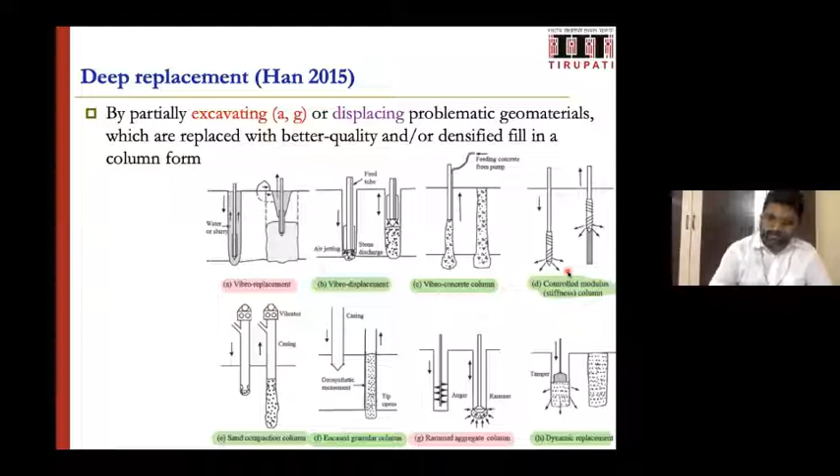So next is the deep mixing method, another set of methods. What it will do is like shallow depth mixing - what we do in shallow stabilization is the mixing of different materials. The similar mechanism will work, but done at a much greater depth, so we need very sophisticated equipment here, like augers putting some material and mixing, and finally forming the DMM columns, deep mixing method columns.

The deep mixing material can be anything like lime mixed, or lime cement combination, or lime plus fly ash. These are different combinations that can be used. But finally what we do is form a highly stiffened columnar material as DMM columns, which will resist a lot of shear stresses, thereby reducing the liquefaction potential.

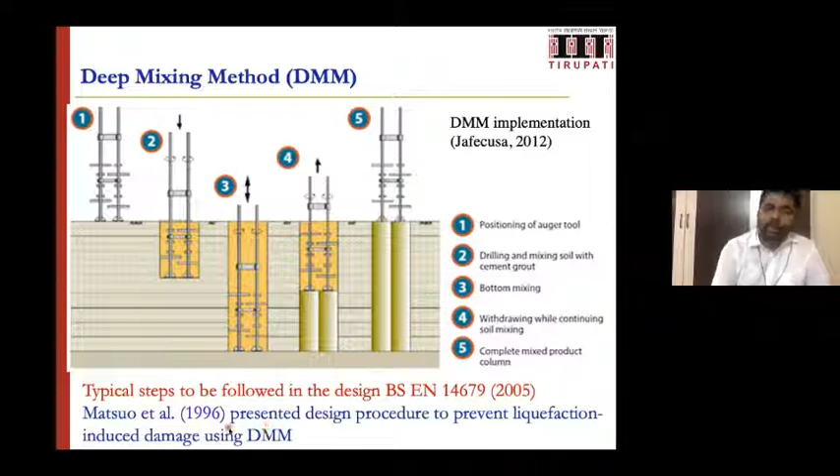Typical steps to be followed in design of these DMM methods can be seen in this document, and some liquefaction related details using DMM are presented in this 1996 document, which I'm not going into the details of. The DMM columns can be installed in different patterns, like in the stone columns whatever we have shown - we can have the square pattern, triangular pattern, and a columnar pattern.

Suppose you already constructed a building somewhere, and you want to put a wall around the whole ground as an isolator and stiffen the whole area - we can go for this type of pattern. Different patterns can be chosen as per the requirement.

Another useful and quick method for improving the ground is deep dynamic compaction. Many construction sites will have heavy equipment like a crane, high lifting crane, or some sort of excavator. If you have a huge tamper dropping weight, and you drop it from a larger height, then you can compact the particular ground. Of course, there is some requirement - suitability of the particular ground needs to be seen.

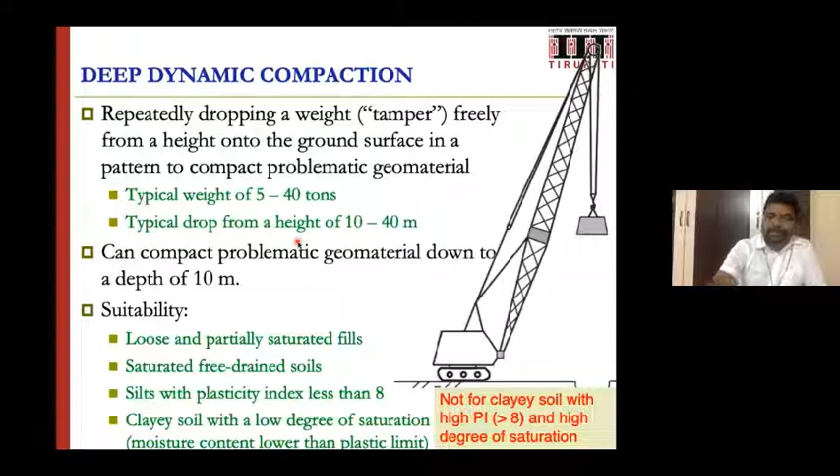Loose and partially saturated fills and saturated free-draining soil should be there. It will not work for clay soil having plasticity index greater than 8 - it will not work, but otherwise on other ground we can work. Typical weight of this tamper will be about 5 to 40 tons depending on the depth of treatment we are looking for. The typical drop is from a height of 10 to 40 meters, again depending on the level of improvement needed. This dynamic compaction design aspect can be seen from the FHWA report shown here.

That's what, in general, improving the soil involves. Basically what it will do is create a crater type, and one can calculate how much is the deformation, how much is the improvement in the density.

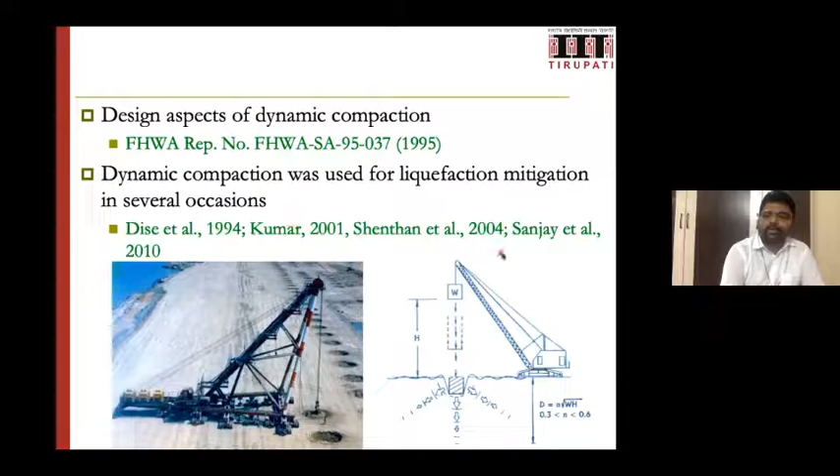If you are improving the density, the associated strength parameters—whether C, phi, or shear velocity—obviously you will get a lot of improvement. With improved strength parameters, you will have more resistance and liquefaction can be mitigated. Some liquefaction mitigation issues have been addressed by several researchers depending on several projects.

Broadly, we can say granular piles, stone columns, sand compaction piles, or columnar inclusions are used for ground improvement. We also have deep mixing columns, deep replacement methods, and deep dynamic compaction. These are various classes of methods used for improving liquefaction mitigation of a particular ground.

Besides, in terms of ground subsidence during any liquefaction or earthquake related event—this is after the 1995 Hyogoken Nambu earthquake in Japan—they have obtained data from various sites. Here you see unimproved SPT and the subsidence shown for unimproved cases.

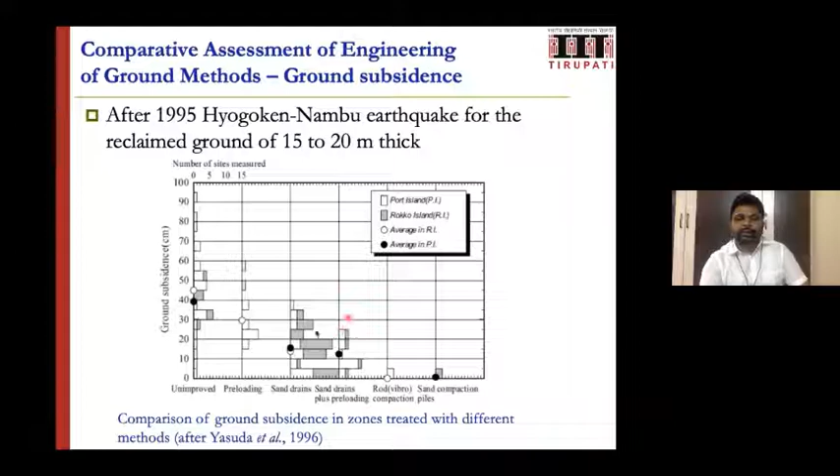If there is no improvement, it is about 100 centimeters, close to 1 meter, of settlement. Whereas if you apply these improvement methods, you can see about 30 centimeters to almost 5 centimeters of deformation observed for different projects. That shows the effectiveness of these methods.

So with that, I'll come to the concluding remarks. As you can see from some of the pictures, liquefaction is the most hazardous damage during an earthquake, because the associated structural damages are particularly severe in the case of huge public infrastructure—highways, railways, overbridges—and a lot of damage will be there.

In principle, one can apply ground improvement methods—engineering of ground—extensively employed for liquefaction mitigation. The main principles we look for in ground improvement methods are densification, solidification, reinforcement, and drainage. Among various methods listed, stone columns and granular piles are the most widely adopted.

Why? Because they cover the three main principles: densification, reinforcement, and they also provide drainage facility. Because of these three principles and associated advantages, they are widely used. Other methods can also be used depending on the application.

Basically, some order of priority was given—I'm putting a question mark here, meaning it is not a standard order of priority. It may change depending on the site, economics, and availability of methods. Just as a case, sand compaction piles, deep soil mixing, and dynamic compaction methods may be considered in the order of priority.